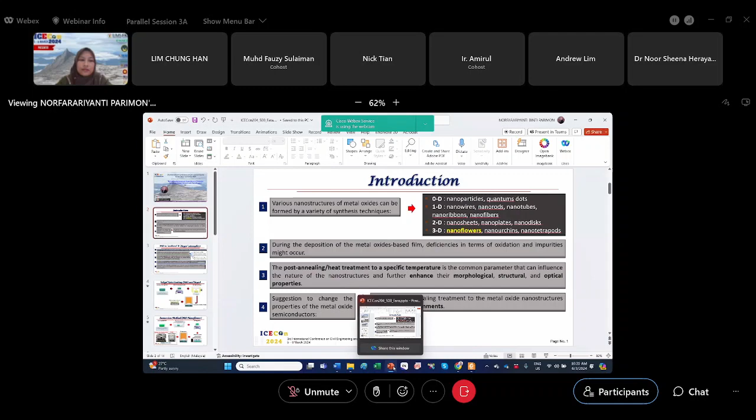Hello, Assalamualaikum, can you hear me? Yes, I can hear you. No problem, but my voice has echo, sorry, I just unmuted again. Okay, can you see my slide? Yes, I can, thank you. Thank you, Mr. Chairperson, IR Amirul.

Okay, my name is Norfarariyanti binti Parimon. I'm from the Center of Research in Energy and Advanced Material (CREAM), Faculty of Engineering, UMS. Today I would like to share my preliminary results of my research, entitled Annealing Environment Dependence of Solution Immersion Grown Nickel Oxide Nanoflowers.

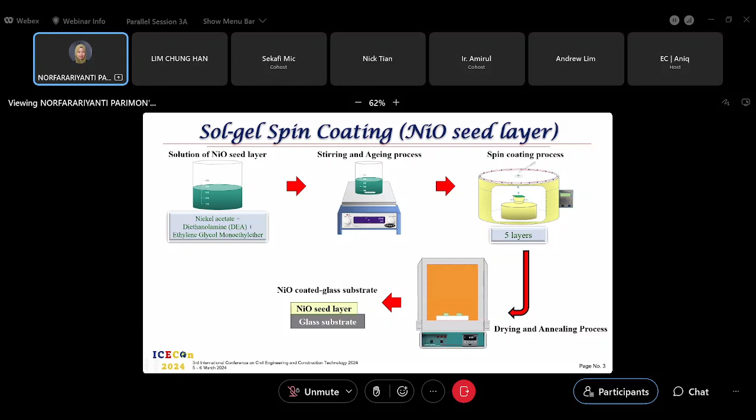Okay, previously we used ITO, which is indium tin oxide coated glass substrate, but this time we use the seed layer to improve the adhesion of nanoflowers.

Okay, and then the second step is using the immersion method. The solution preparation uses nickel nitrate, HMT, and deionized water, and we go through the sonication process, stirring, and the immersion process is at 95 degrees C for 2 hours in a water bath.

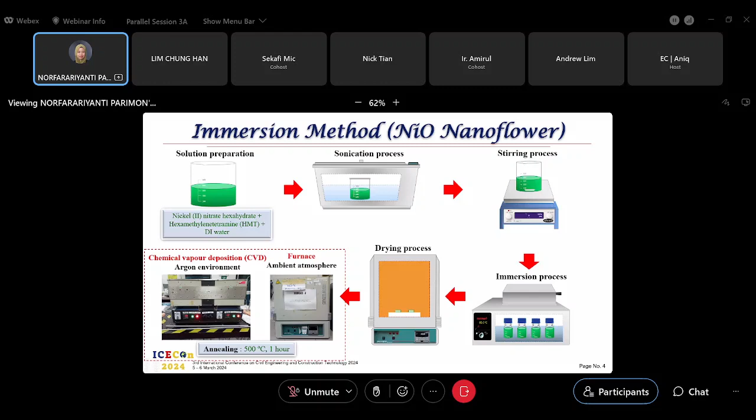And then a drying process at 150 degrees C, and the crucial part is the sample will anneal in the CVD, chemical vapor deposition, and the furnace. So in the argon environment, we anneal or calcine in the chemical vapor deposition, and with the ambient atmosphere, we anneal the sample in the common furnace. The annealing temperature is 500 degrees C for 1 hour.

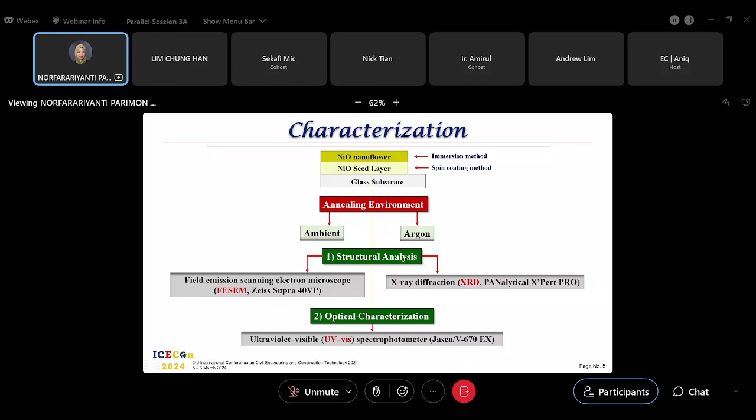Okay, for the characterization of the two samples, we just focus on the structural analysis and optical characterization. So maybe further improvement or characterization needs to be done other than the structural and optical. For the structural, we analyze using FESEM and XRD, and the optical characterization is using a UV-Vis spectrophotometer.

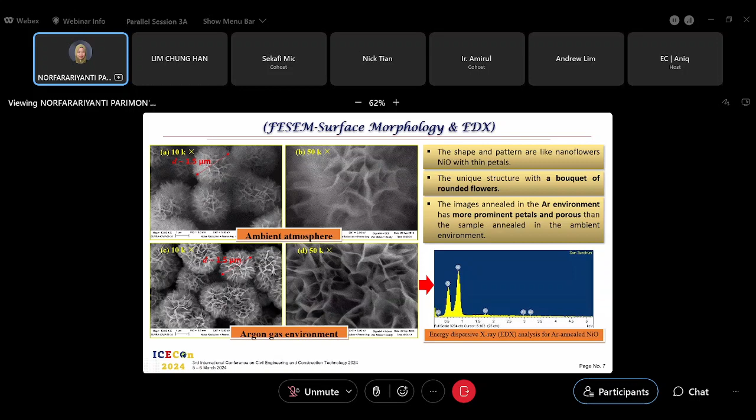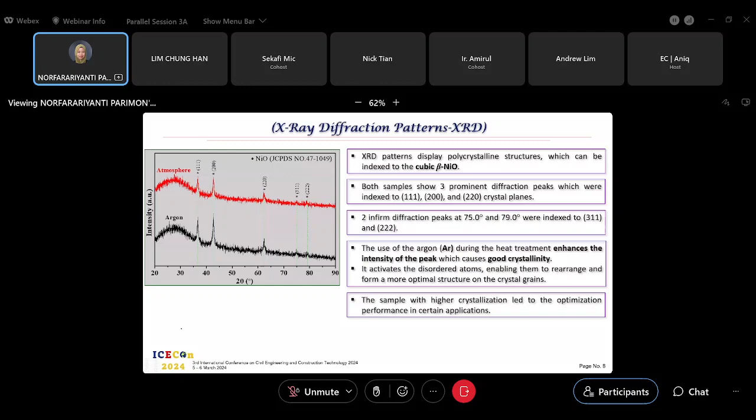And then we can observe from the diffraction peaks that with the use of argon, the intensity of the peaks could be higher, and it can enhance the crystallinity of the sample.

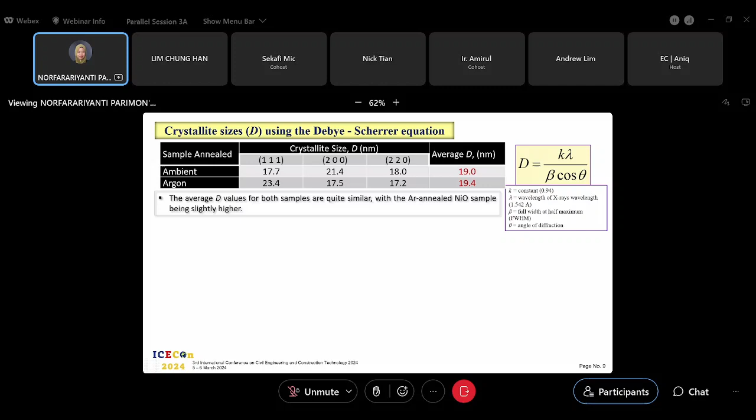Okay, and then we calculate the crystallite size of each sample and get the average crystallite size. We can see both samples are more or less the same size, with the argon-annealed nickel oxide sample being slightly higher, 19.4. We use the Debye-Scherrer equation to calculate the crystallite size.

Okay, as I said earlier, we have to improve the characterization with others, let's say electrical measurement, to know which is better from the result. Okay.

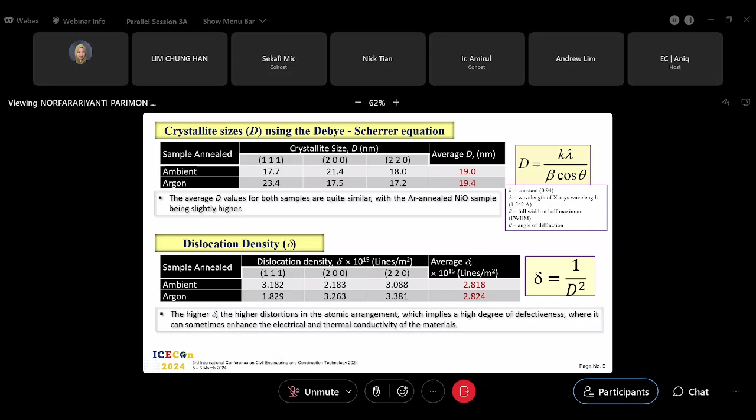Okay, for the optical properties, we measure the transmittance and absorbance of the samples. From the transmittance plotting, we can see the argon annealed sample has higher transmittance than the ambient atmosphere, which is 37% and 32%. Okay, the transparency is slightly higher in the argon atmosphere.

So maybe the variation of the thickness of the nanoflower causes the transmittance difference. But for both samples the transparency is lower than 50%. For the absorbance, we can see for argon the absorbance edge is below 410 nanometer, but for ambient atmosphere, it's lower than 360 nanometer.

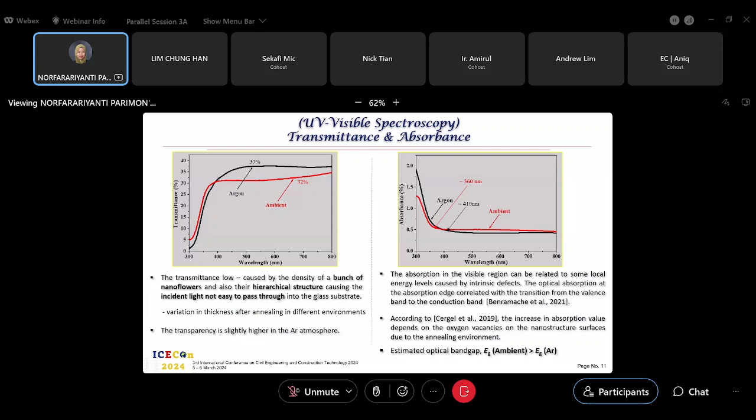And then we can estimate the optical band gap for the ambient annealed sample is larger than the band gap of the argon annealed sample. For the conclusion, we successfully deposited and grew the nickel oxide nanoflowers using the immersion method, and then we studied the annealing environment between ambient and argon.

Then we can see the surface morphology of both samples. For argon it is more prominent and porous than the ambient atmosphere. And from the XRD and optical properties, nickel oxide annealed in the argon environment exhibits improved crystallinity and higher transparency. And higher crystallite size was produced in the argon atmosphere, while generating a higher density of defects.

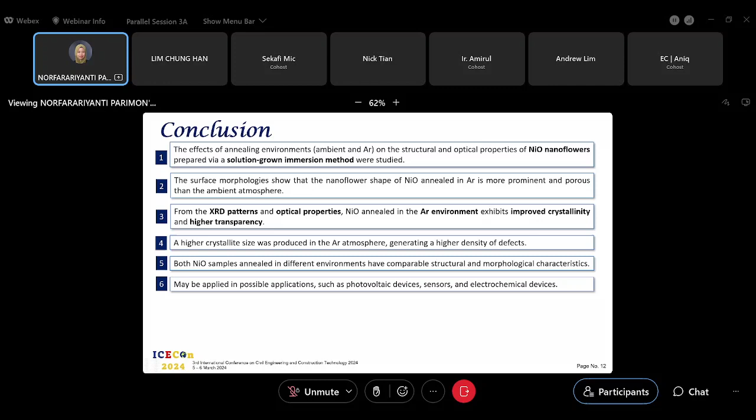So both samples annealed in different environments have comparable structural and morphological characteristics. We can maybe apply this sample for possible applications in photovoltaic devices, sensors, and electrochemical devices. Other than argon, we can suggest annealing the sample in nitrogen and oxygen atmospheres to see the difference in terms of their properties.

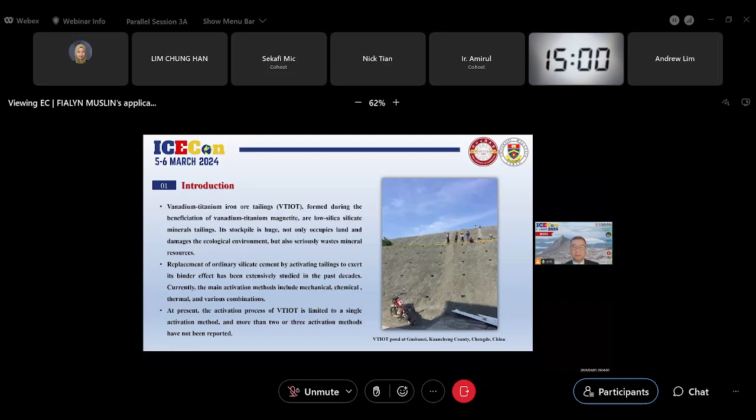In my study, on the basis of the best active tailings powder obtained from mechanical activation of VTIOT, with an activity index of 75%, we further adopt the hybrid activation technologies of thermal activation or chemical activation to study the effect of calcination temperature on the physical and chemical properties and activity index of VTIOT, and the effect of type and amount of activators on the activity and hydration mechanism of VTIOT, with the aim of enhancing the potential of the sustainable utilization of VTIOT as mineral admixture in replacement of cement and to support the research and application of green and low carbon building materials.

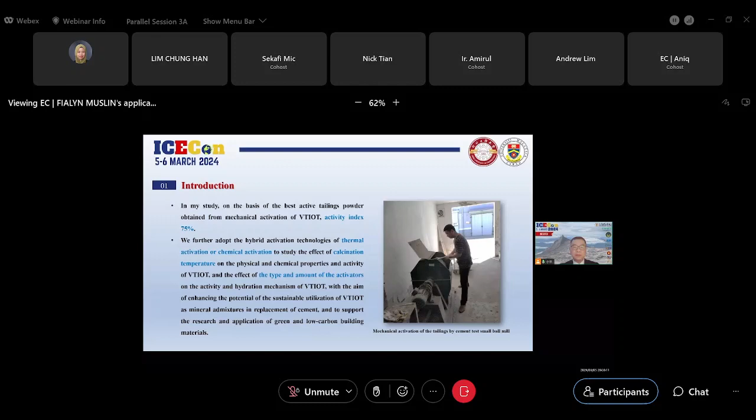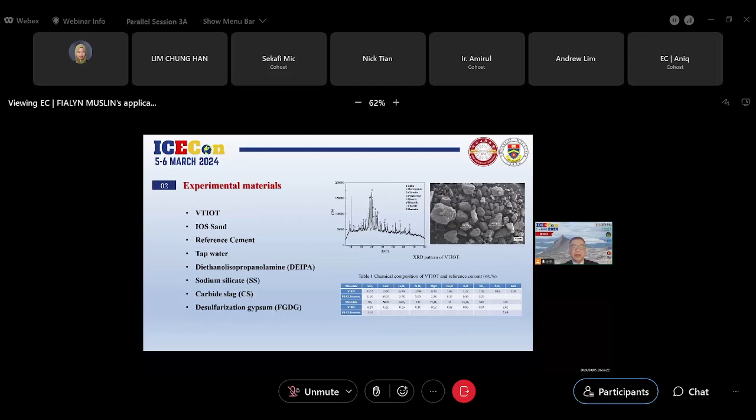Second, experimental materials: VTIOT, ISO sand, reference cement, tap water, DEIPA, SS, CS, FGDG. Third, experiment method: VTIOT powder was calcined in the muffle furnace. The temperature was set from 550 degrees to 950 degrees, holding 2 hours. The FGDG was calcined at 800 degrees, holding 2 hours. CS was calcined at 850 degrees, holding 2 hours. SS was diluted at 13.52%. DEIPA was diluted at 0.62%.

Mineral composition and morphology analysis of VTIOT used XRD and SEM, and to assess the active component within the VTIOT powder, the alkaline leaching method was employed. The activity index was determined by employing the following specific formula. The activator with the highest activity index in each group was selected for the paste experiment, and heat of hydration used TAM Air, and TG used a thermogravimetric analyzer.

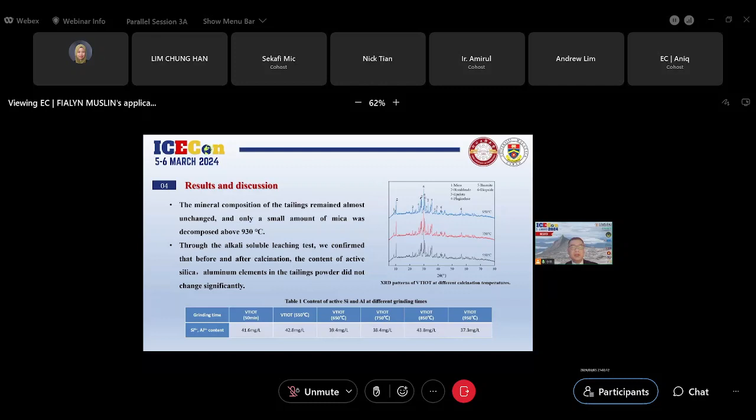The mortar test also shows that the 7-day and 28-day compressive strength of specimens after doping calcination and before doping calcination had no significant increase or decrease. This suggests that the use of thermal activation doesn't improve the activity index of VTIOT mortar in this temperature range.

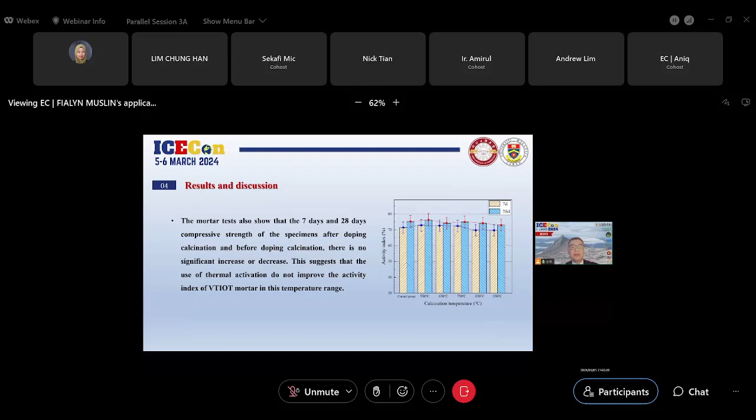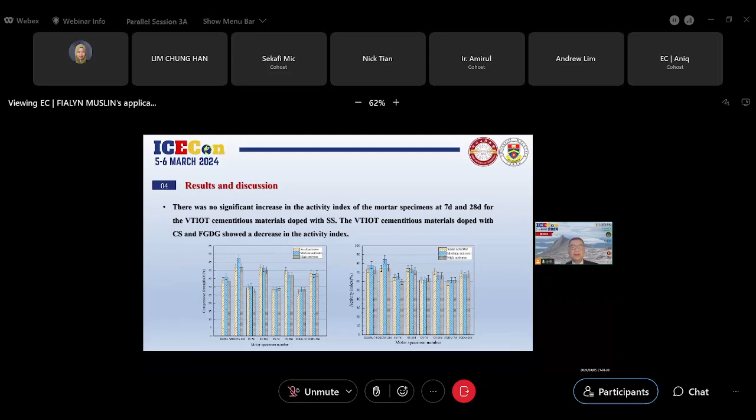2. Chemical activation. The mortar test shows that the 7-day and 28-day compressive strengths with 0.02% DEIPA are 36.1 MPa and 47.6 MPa respectively, promoting the hydration of VTIOT cementitious materials. Its 7-day and 28-day activity index reached 78.3% and 85% respectively. There is no significant increase in the activity index of specimens at 7-day and 28-day for VTIOT cementitious materials doped with SS, and those doped with CS and FGDG showed a decrease in the activity index.

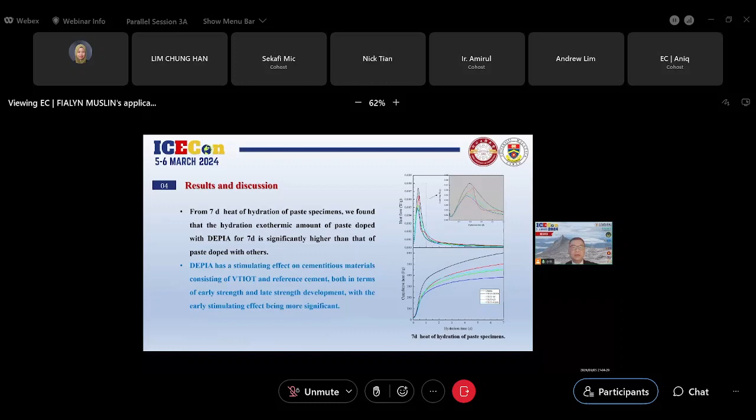From the heat of hydration of paste specimens, we found that the hydration amount of paste doped with DEPIA for 7 days is significantly higher than that of paste doped with others. DEPIA has a stimulating effect on the cementitious materials consisting of VTIOT and reference cement, both in terms of early strength and later strength development, with the early stimulating effect being more significant. From TGA, DTG, and SEM, we found that doping with different activators has some effect on hydration products formed by the cementitious material.

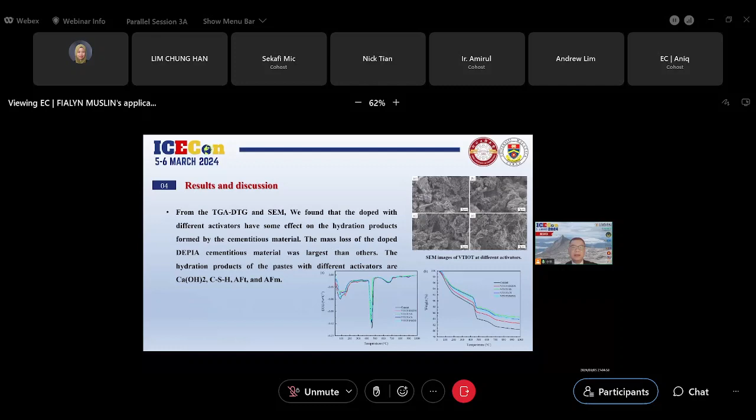The mass loss of the cementitious material doped with DEPIA was larger than others. The hydration products of paste with different activators are CSH, AFt, AFm, etc.

5. Conclusion. Calcined VTIOT at 550 to 950 degrees: the macromorphology, mineral phase, active silicate, and aluminum element of the tile didn't change significantly. Mechanical thermal activation failed to further improve the compressive strength and activity index of VTIOT mortar. The mechanical chemical activation type and amount of activator have a greater effect on the compressive strength and the activity

index of VTIOT mortar. The mortar doped with 0.02% DEPIA had a 28-day compressive strength of 47.6 MPa and an activity index of 85%. Compared with the non-added activator mortar, the activity index greatly improved.

Under the action of different activators, the hydration heat induction period of paste with VTIOT cementitious material is prolonged, and the hydration amount of paste doped with DEPIA for 7 days is significantly higher than others.

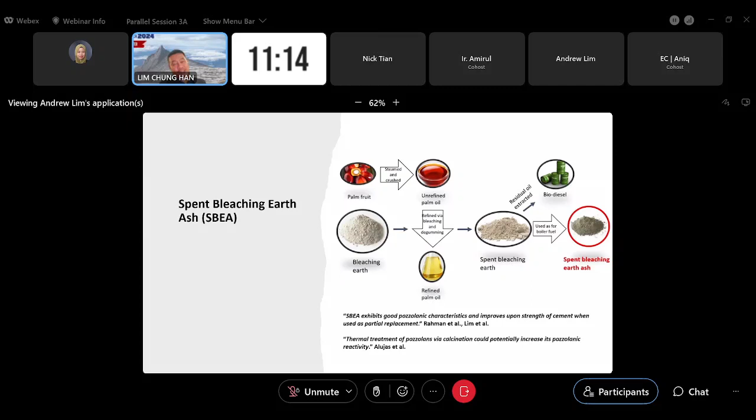Although in truth it's a bit more complicated than that. But in layman terms, a pozzolanic material is basically a material that you can use to partially replace cement. So you use waste material to replace cement, so you're saving cost, you're saving the environment, things like this. So that's the material.

Next, I need to briefly also talk about what a pozzolanic reaction is, because this will become relevant when I talk about the different methods which I'm going to use to assess the reaction. So basically, this is cement here. When you mix cement with water, you end up with what's known as calcium silicate hydrate, or in short, we just call it CSH in the industry.

CSH is what gives strength to your concrete. So when you mix cement with water, you end up with this, which gives strength to your concrete. But you also end up with a bit of calcium hydroxide within the mix, which doesn't do anything.

So what you can do then is introduce your pozzolanic material into the mix as well, and that will react with all this residual calcium hydroxide that is sitting there doing nothing to produce additional CSH. So basically, instead of just one portion of CSH, you now end up with two portions of CSH.

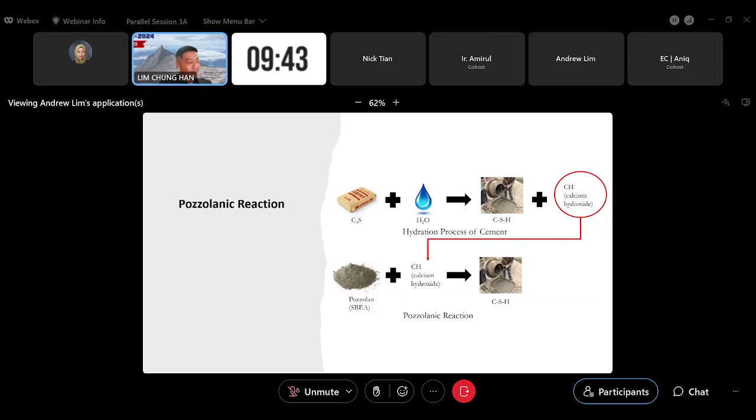So essentially, you should get more strength out of the whole mix. Okay, so that is the gist of what pozzolanic reaction is about. All right, okay, so for the test,

basically we are focusing on only 3 types of samples. So for the control sample, I'm using cement. Just your normal retail bag of cement. So I'm using that for control.

Test specimen 1 would be SBEA, the pozzolanic material itself. Test specimen 2 is SBEA but treated. So treated SBEA.

The way I'm treating it is very similar to what Nick did, through calcination. We expose it to high heat for 4 hours, 700 degrees Celsius, if not mistaken. As you can see, from black color, it turned into reddish orange color after being exposed to high heat for 4 hours. So those are the 3 different samples that I'm going to use to test out the 3 methods.

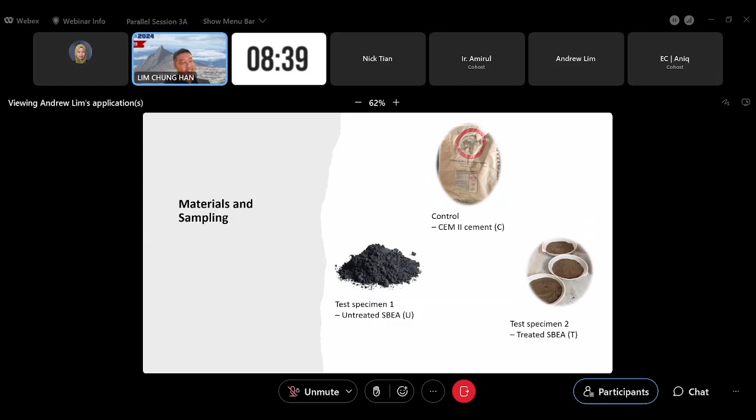The first method that I'm going to use is this: strength activity index method. This method is basically based on strength, assuming pozzolanic reactivity is related to mechanical strength. So we cast mortar cubes.

We cast a control set and a few sets containing the SBEA pozzolanic materials. The control sample would be set at 100% strength index, and then all the test materials, you would assess the strength in relation to the control sample strength, 100%. So if it's more than 100%, that means your specimen is stronger than the control sample. If it's less than 100%, that means it's not as strong as the control sample.

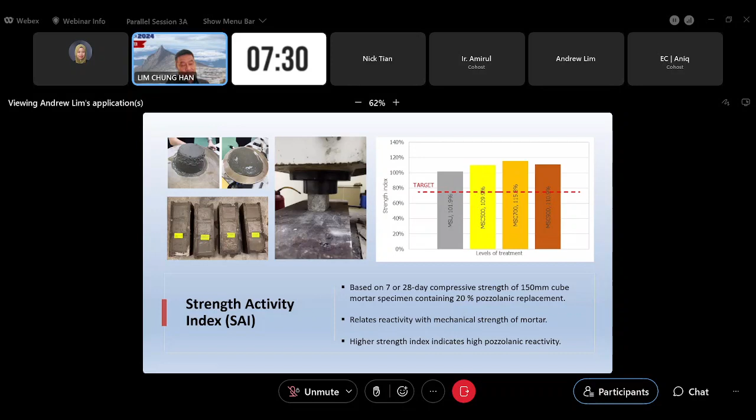So this is the first method I'm assessing the pozzolanic reactivity with, the strength activity index, so based on strength. The second method is very different compared to the first.

The second method is based on XRD, which is very similar to what Dr. Parimon did earlier. This method bases the pozzolanic reactivity on the morphology and, more importantly, the crystallinity

of the material. So basically what we do is we also cast, for this test, our mortar samples, and then we take a small chunk out of the mortar sample, crush it, and put it in this machine for it to generate the XRD diffractogram, which will tell us how crystalline the material is.

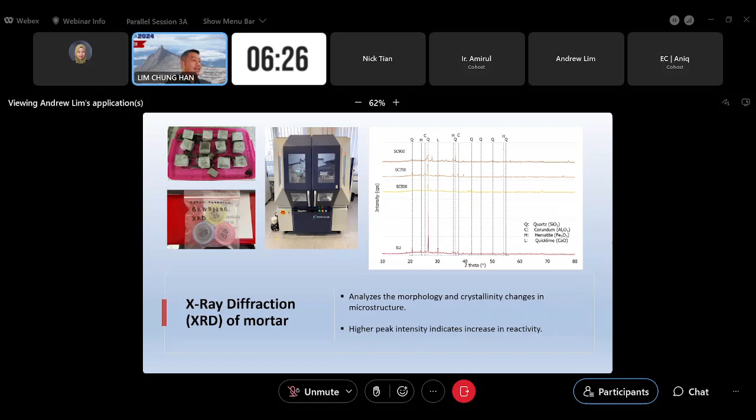And we will relate the crystallinity with the reactivity. So in essence, the higher the intensity, it should reflect higher reactivity as well, in essence. At least. So, finally, the third method.

This is the third and final method that I'm going to use, which I call the chemical method, the Frattini test. So what this does is, as you can remember, from when I was going through the pozzolanic reactivity slides just now, SBA or pozzolans require the presence of calcium hydroxide to react with, to produce this CSH paste.

So what this test does is we artificially introduce calcium hydroxide. We chemically produce some calcium hydroxide, and then we drop our pozzolanic material in there, mix it in to see whether this calcium hydroxide gets consumed or not. If it gets consumed, that means some pozzolanic reaction is happening.

So by the end of the experiment, if you end up with less calcium hydroxide, that means you end up with a lot of pozzolanic reactivity. So this is what I call the artificial method, using some chemical trickery. From this test, essentially what we're looking for is the lower the residual calcium hydroxide that remains, the higher reactivity you should get. So these are the 3 tests, in theory.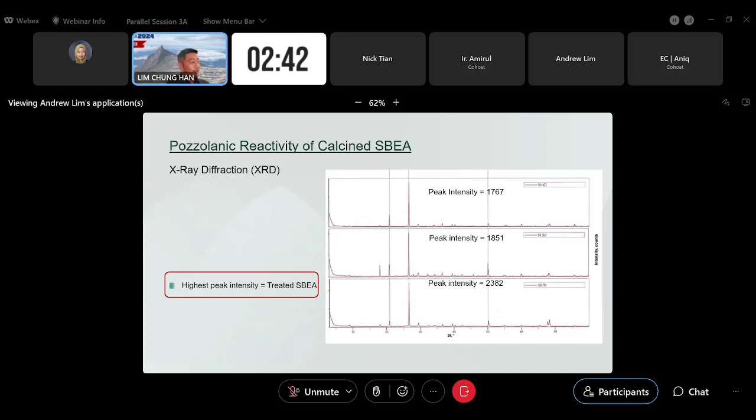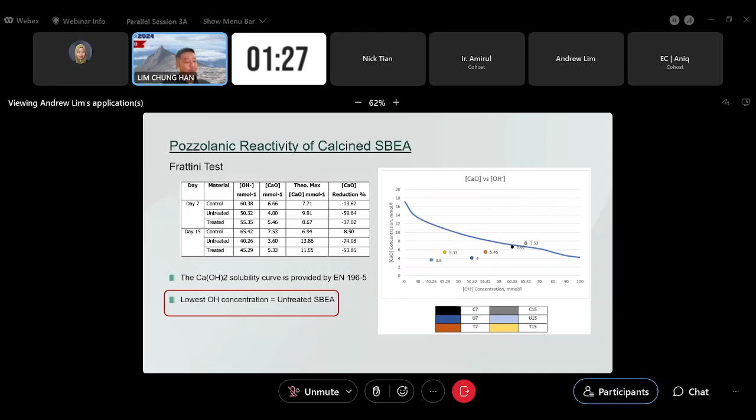So to conclude, what we're seeing here is the Frattini test and the SAI test - the first and the third test are giving us very similar results. In other words, it's telling us that the treatment of the pozzolanic material is not actually giving us any benefit. However, the XRD test is telling us a slightly different story - it's telling us that the treated one is the one giving us better performance. So as you can see, between the three methods, there are some differences between what results you can get. So yeah, that's basically it. I think that concludes my presentation for today.

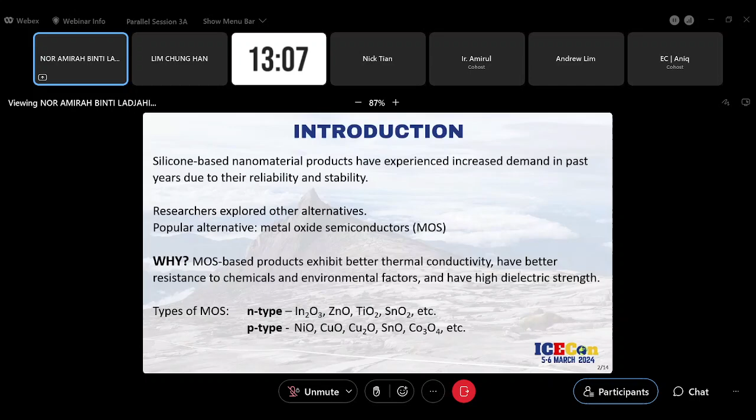So, starting with the introduction, in the past few years there has been a remarkable increase in the popularity of products made of silicon-based nanomaterial across various industries due to their reliability and stability. However, researchers have been actively exploring alternatives to replace silicon-based products that can perform as well or even better. Among those alternatives, they often use metal oxide semiconductors, which have demonstrated great thermal conductivity potential, chemical and environmental resistance, and dielectric strength, for example in electronic devices, sensors, capacitors, and semiconductor devices. Basically, there are two types of metal oxide semiconductor, N-type and P-type.

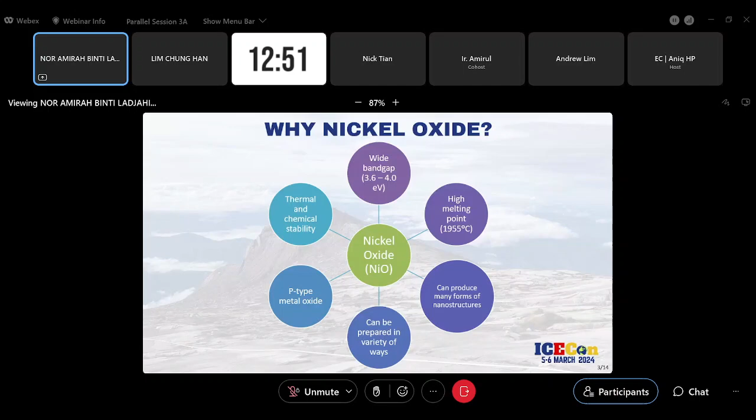So moving to the content of our work, we are choosing nickel oxide, a P-type metal oxide semiconductor, as a precursor due to its unique properties. As you can see here, there are 6 properties. For doping, we are using lithium. Why? Because previous research has proved that adding a dopant element into the precursor sample can modify the conductivity of the sample. Popular metals often used by researchers are zinc, manganese, chromium, lithium

and copper. We chose lithium because lithium has high mobility, which means it can easily move through the material, and has unique electrical properties, where it can donate electrons easily, allowing it to alter the conductivity and electronic structure of the semiconductor. So this work basically examines the lithium doped nickel oxide properties compared with pure nickel oxide.

To develop undoped nickel oxide and lithium doped nickel oxide samples, we started with glass cleaning, because we deposited the sample on a glass substrate. We deposited nickel oxide solution through a sol-gel spin coating method, producing a nickel oxide thin film. We continued the process through the immersion method, then continued with the characterization.

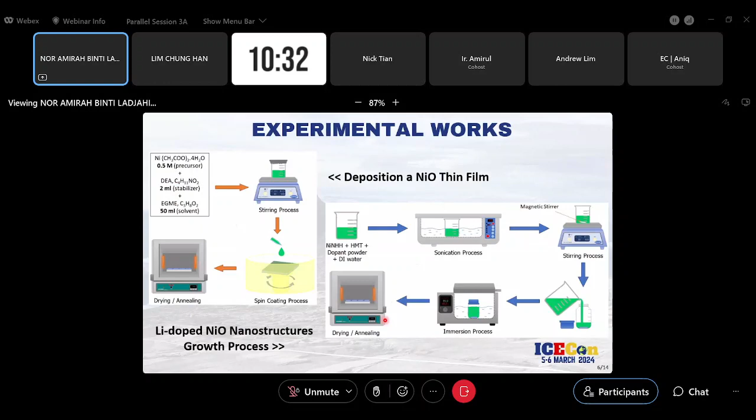In more detail, for the nickel oxide deposition process, we use a mixture of nickel acetate, diethanolamine, and 2-methoxyethanol. These act as precursor, stabilizer, and solvent, respectively, to form a thin film. So this is the process, while this picture represents the growth of the nanostructure of both undoped and lithium doped nickel oxide. And this is the parameter of the experiment.

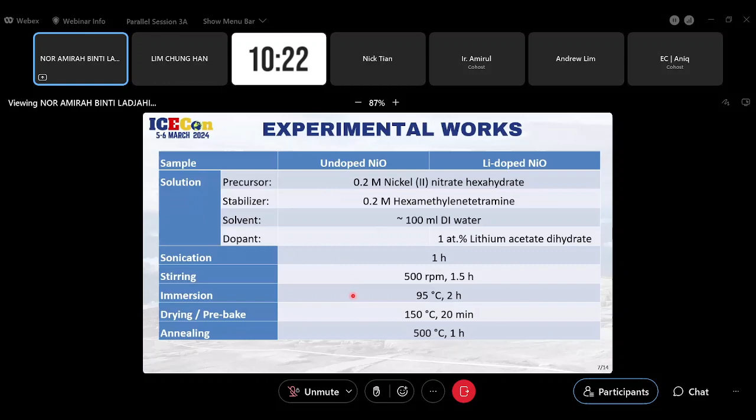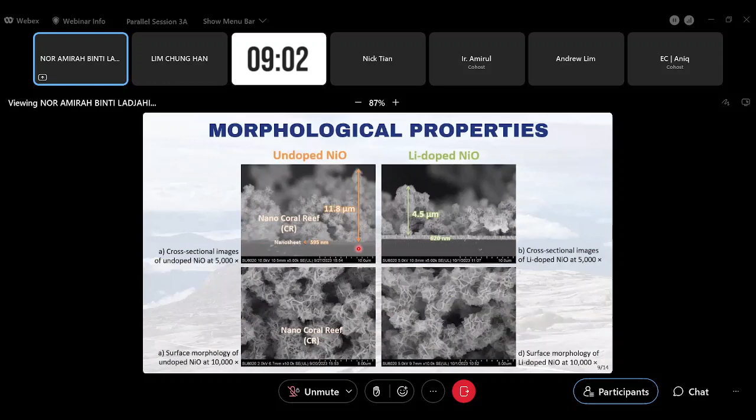For the other results, structural, optical, and electrical, I will conclude in the conclusion part. The undoped and lithium doped nickel oxide structures were successfully synthesized using a sol-gel immersion method. Significant differences exist between both samples regarding their properties. As I mentioned before, I use the thickness of the nanosheet to run the other properties.

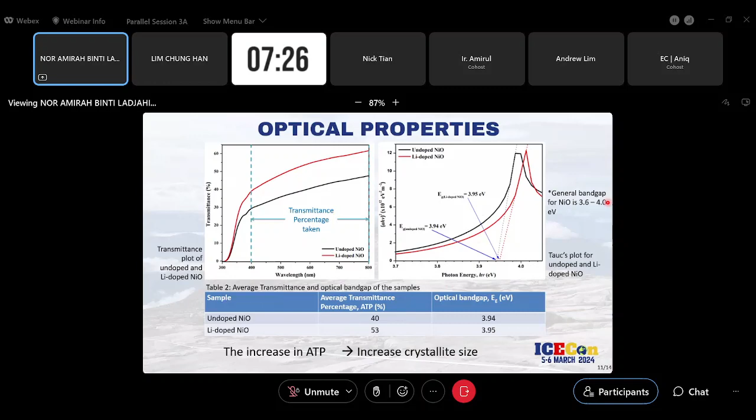Lastly, for electrical properties, the conductivity of lithium doped is higher than the undoped sample. From here we can conclude the properties of nickel oxide could be improved with the incorporation of lithium as the dopant element. Further information about the results you can ask during the Q&A session.

As we're running out of time.

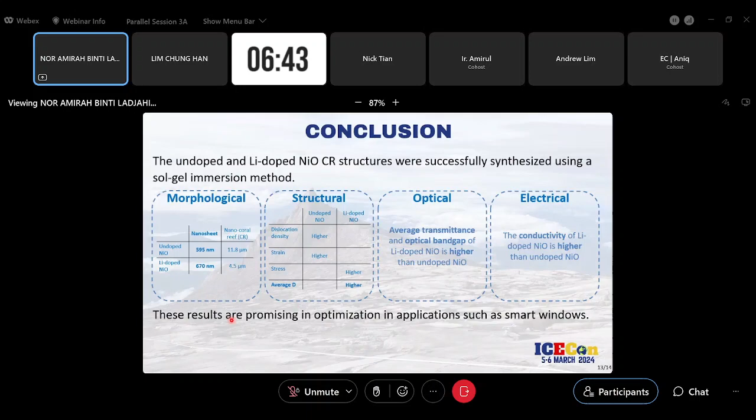Okay. So this result is promising for optimization in certain applications such as smart window material that can change color and transparency in response to the applied voltage.

A review of nanotechnology applications in sustainable cementitious materials. This paper is prepared by Prof. Farid Abed, and the secretariat will play the video for us to watch. And any questions, perhaps you can write them down and send them to the secretariat for them to convey to the author of the paper. Thank you.

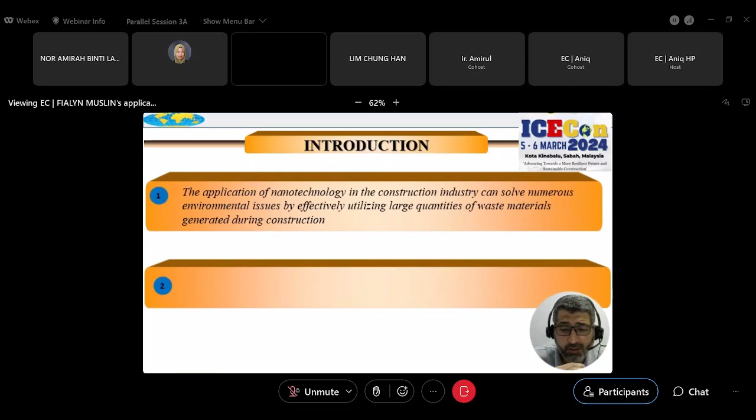First one is the application of nanotechnology in the construction industry can solve numerous environmental issues by effectively utilizing large quantities of waste materials generated during construction. And nanotechnology can improve the workability, compressive, flexure, and tensile properties, mechanical properties, as well as the durability properties, such as the water absorption, chloride ion permeability, and shrinkage.

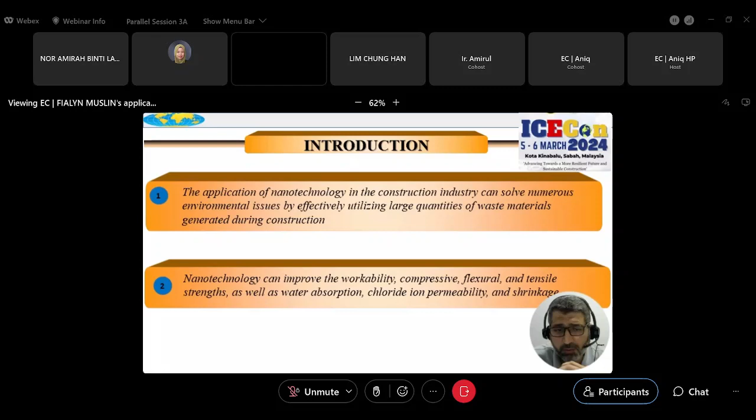The problem statement here that we're trying to state is that a substantial volume of waste materials remains unused, unutilized, and unrecycled, which in turn is contributing to the environmental challenges that we face in our life.

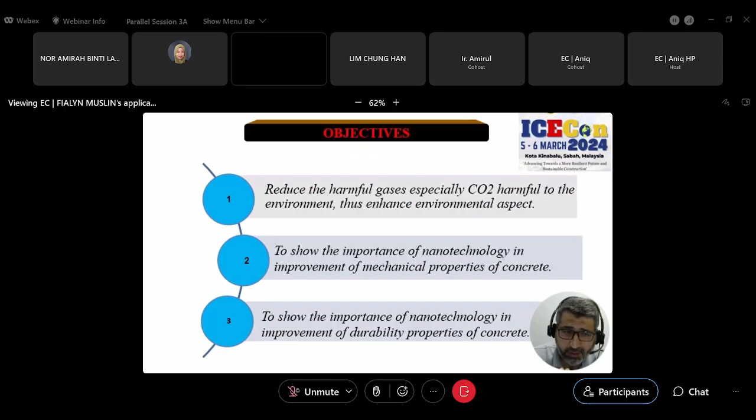So the main objectives of this review is to show the feasibility of the use of nanotechnology in reducing the harmful gases, especially CO2, or carbon dioxide, harmful to the environment, thus enhancing their environmental aspect. To show the importance of nanotechnology in improving both mechanical properties and durability properties of the concrete.

Before starting on the outcome of the literature review, let me just go over some statements from the literature that we know, but it's good to go over them again. As you know, the production of 1 ton of cement leads to release of almost 0.7 to 1 ton of emissions of carbon dioxide into the atmosphere, causing climate change and environmental pollution.

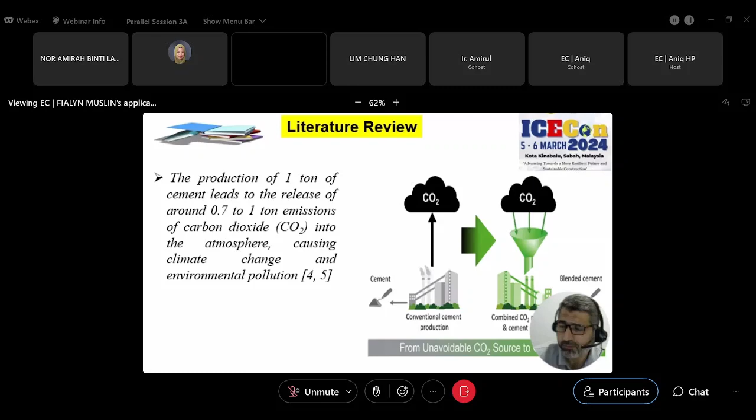So the main idea is actually to convert the conventional cement production from an unavoidable CO2 source to a sink of CO2 and reduce its negative effect on the environment.

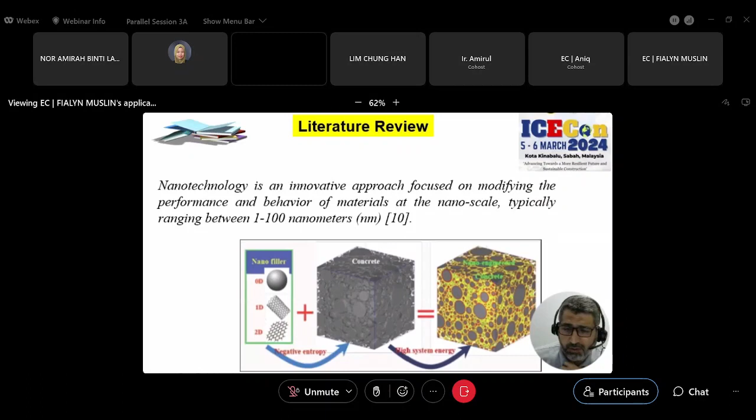One more statement here is that nanotechnology is known as an innovative approach focused on modifying the performance and behavior of materials at the nanoscale, usually between 1 to 100 nanometers. So changing the negative entropy, the use of nanofillers in the concrete will produce high system energy and nano-engineered concrete. So this process can also achieve significant environmental and sustainability benefit within the construction industry.

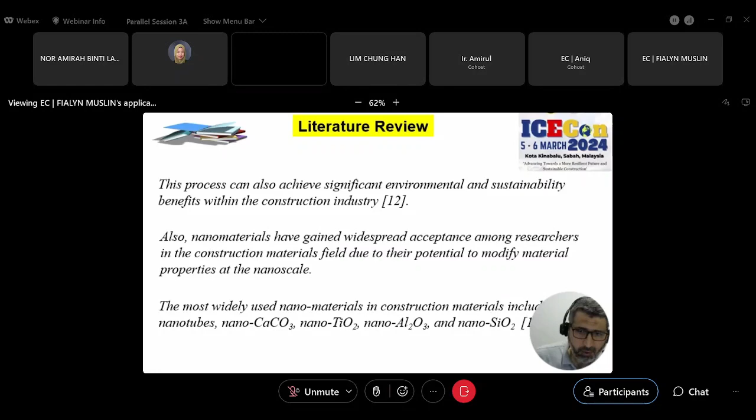The most widely used nanomaterials in construction include carbon nanotubes, nano CaCO3, nano titanium oxide, nano alumina oxide, and nano silica oxide. So I'm going to show you some outcomes of this literature review. The first is the effect of using nanoclay on the properties of cement, mortar, and concrete.

Their outcome and its effect on the concrete properties: they observed that the high pozzolanic activity and large surface area of nanoclay contribute to enhanced performance when added to concrete samples, in turn resulting in increased compressive, flexure and tensile properties.

Another study by Mihrabi also showed that with the use of up to 9% of nanoclay in almost 350 kilograms per cubic meter cement content, owing to their microfilling ability and pozzolanic reactivity, the use of nanoclay leads to an increase in the density of concrete. In addition, the high pozzolanic reactivity and specific surface area of nanoclay can minimize the porosity and increase the density of the cement mortar.

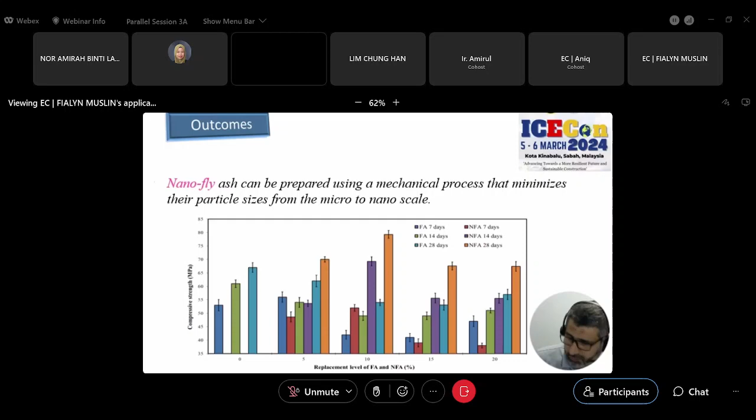And you can see from here that the use of 10% was the most optimum percentage in improving the compressive strength of concrete, from I would say 60 to 85 megapascal, which is huge. But then they noticed that it can start decreasing. So the results showed that 10% of nano fly ash or fly ash is more optimum to improve the compressive strength.

Another outcome here is to show the effect of nano palm oil fuel ash, or POFA, on the cement, mortar, and concrete properties. Hamada et al., which is our postdoc here, used up to 150 kilogram per cubic meter nano POFA content with cement content of up to 500 kilogram per cubic meter. They showed that the use of 30% nano POFA as a cement replacement has significant impact in improving the workability of concrete mixtures. Nano POFA led to increasing the compressive strength up to 58 megapascal,

as well as improving the durability of concrete. In another study by Wee et al., who used up to 400 kilogram per cubic meter nano POFA with cement content of 450 kilogram per cubic meter, they observed that the compressive strength increased with time due to creating further CSH gels. Consequently, the optimum proportion of nano POFA is 30%, which should be used to get the best performance of concrete.

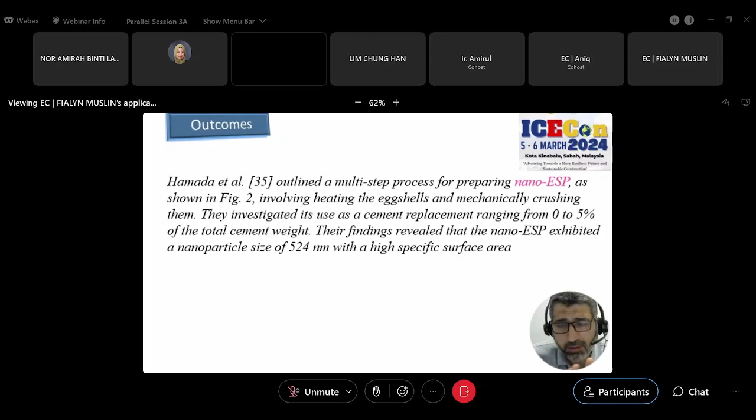So Hamada et al. outlined a multi-step process for preparing nano eggshell powder, as shown in figure 2 here. They outlined a multi-step process for preparing nano ESP, eggshell powder, involving heating the eggshells and mechanically crushing it. So as you can see here, heating in an oven up to 110, then mechanically crushing it. Then they investigated its use as a cement replacement, ranging from 0 to 5% of the total cement weight. Their findings revealed that the nano ESP exhibited a nanoparticle size of up to 524 nanometers with a high specific surface area.

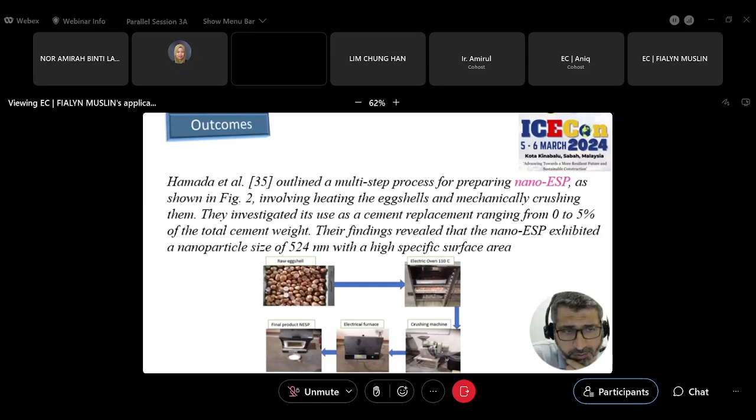Another table showing the outcomes here is the effect of nanoslag on the properties of cement, mortar, and concrete. Sahu and Bera used quantities up to 40% of nanoslag content, with cement content up to 537 kilogram per cubic meter. They showed that the addition of 20% nanoslag as a cement replacement resulted in higher compressive strength compared to other concrete mixtures, with an increase of up to 17% compared to the control specimen without nanoslag. However, the compressive strength reduced gradually as a result of adding more than 20%. So 20% was their optimum percentage.

Sadawy et al. also showed that the addition of nanoslag can increase the formation of CSH products, thus resulting in an increase in the early age compressive strength of concrete. Ab Atiyah et al. also used 22 kilogram per cubic meter nanoslag content with 450 kilogram per cubic meter cement content. The addition of nanoslag results in an increase in the density as well, up to 1.43%, and reduction in the porosity and water absorption.

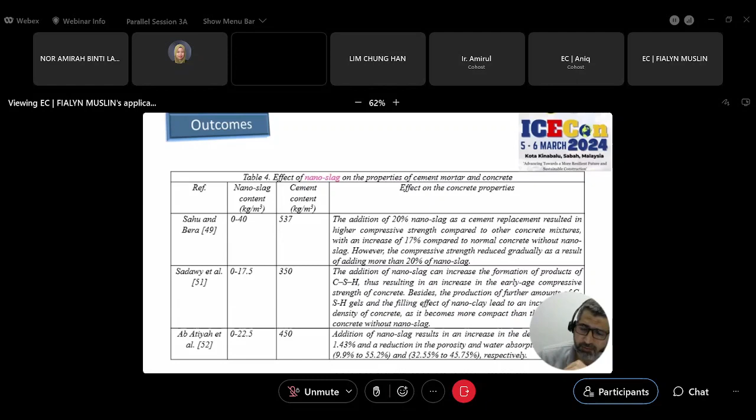This table also shows the effect of using nanoglass waste on the properties of cement mortar. As you can see here, most of the paper is about using the waste, and that is the target of the actual review paper, at the nanoscale. So you can bring glass and then crush it until you reach a certain size at the nano level, and use it in the concrete mixes.

So Onaizi et al. used up to 46 kilogram per cubic meter nanoglass content with cement content of 460 kilogram per cubic meter. They observed that the addition of nanoglass resulted in reducing the slump value by about 12% compared to the reference sample because of the shape and high specific surface area of nanoglass powder. Whereas the addition of 5% nanoglass powder led to an increase in the compressive strength of concrete from 12 megapascal to 21, almost 80%.

Amran also used the same percentage, but he observed that the addition of nanoglass led to a reduction in the workability of concrete, with increasing the nanoglass powder from 0 to 6% enhancing the compressive, flexural and tensile strength of the concrete mix.

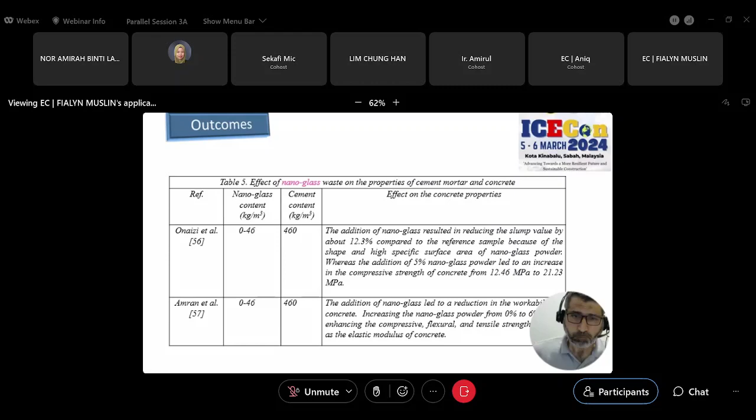So as a general conclusion of these, I don't need to increase the time, so there are many other results to share, but I believe here I will just go over the main point of the conclusion of these studies.

So one of them is the addition of nanoclay and calcined nanoclay can improve the performance of cement concrete and prove to be optimal materials due to their availability, pozzolanic properties, high specific surface area, and cost effectiveness when compared to other materials. Both nano fly ash and nano POFA exhibit a high pozzolanic activity and possess a high specific surface area. Thus, utilizing them as partial cement replacement can lead to increased compressive strength and reduced water absorption.

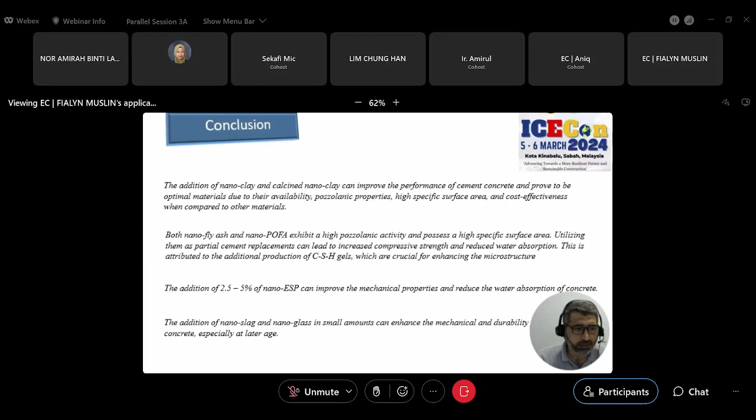This is attributed to the additional production of CSH gels, which are crucial for enhancing the microstructure. Also, the addition of 2.5 to 5% of nano ESP eggshell powder can improve the mechanical properties and reduce the water absorption of concrete. And finally, the addition of nanoslag and nanoglass in a small amount can enhance the mechanical and durability properties of concrete, especially at later stages. So these are the main conclusions.

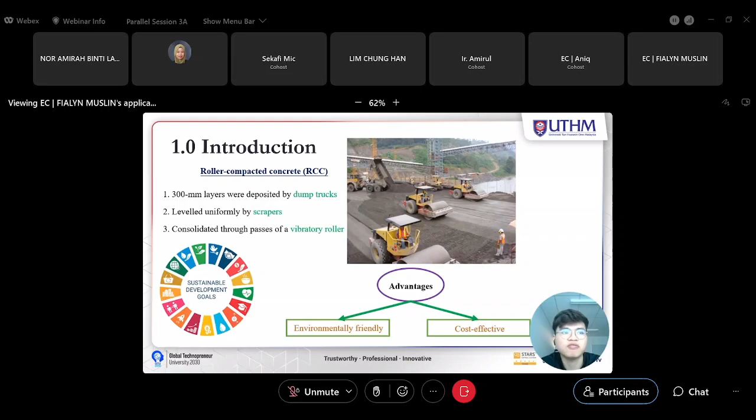So why do we choose RCC? Because of its advantages, which can be environmentally friendly and also cost effective. This is because less cement is utilized for making the mix design for the construction of RCC. That's why it could be effective for achieving the SDG, which is the hot topic now all around the world.

RCC should be designed based on the feasibility study, which has been made for the Nenggiri hydroelectric main dam based on the situation, which is the site, whether it is applicable or not for construction of RCC based on the economics and also other factors.

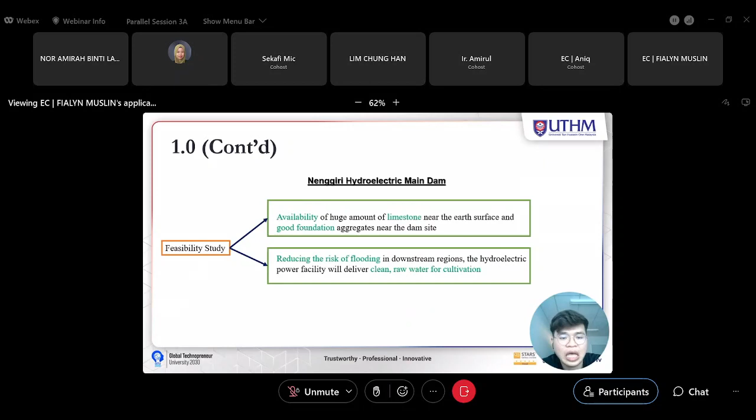Now I would like to present the two factors which are mostly of concern. The first one is the availability of a large amount of limestone near the earth surface and also a good foundation aggregate near the dam site. That's why it is applicable to use these natural resources for RCC construction, using this aggregate which is available on or near the site. Also this can benefit the people, as it can reduce the risk of flooding and also produce clean and raw water for cultivation.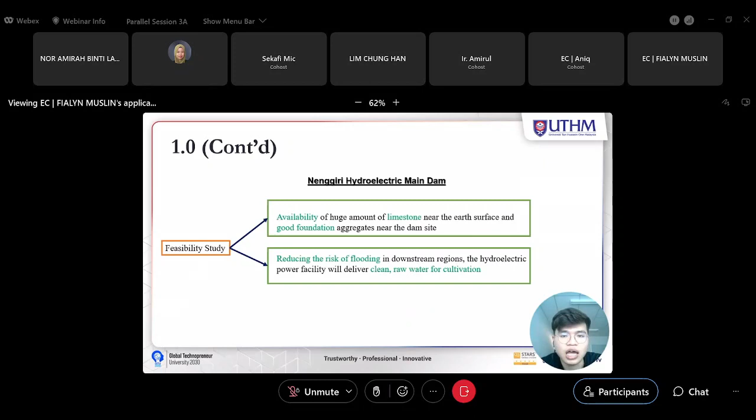The purpose for doing this research is because of a few challenges. First, the mix production plays an important role in RCC dam construction, determining all properties of RCC, which start from the mix design. That's why the mix design should be made properly based on the requirement. That's why various mix designs will be developed and all the properties identified based on the spec, and also the prospect of obtaining suitable material could be challenging based on the site.

That's why all the materials should be evaluated and tested, and then based on the properties of these natural resources, we can do some exercise of adjusting the mix proportion to achieve a desirable final product. And also, last but not least, the trial placement should be considered after all the mix designs have been developed to ensure the suitability and efficacy of the design mix prior to proper placement.

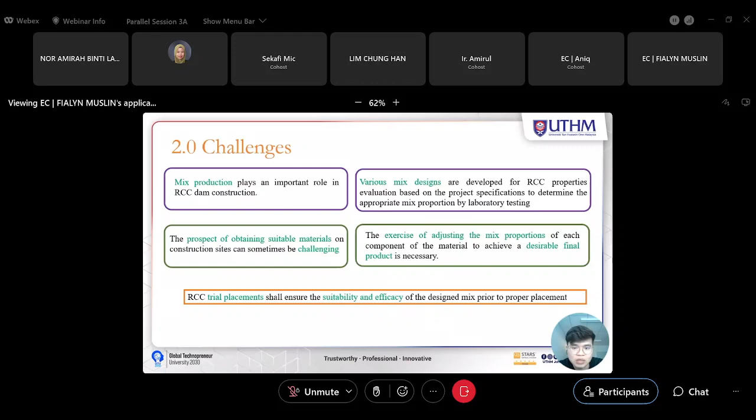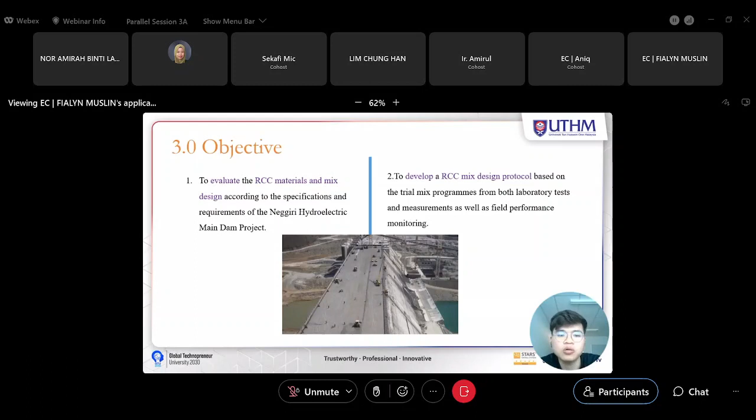The objective of this research is to evaluate the RCC material mix design and also to develop an RCC mix design protocol. Now we are moving to the methodology. So first of all, we have to start from sampling of RCC material to evaluate the RCC materials, which are the aggregate, cement, fly ash, and water based on the spec.

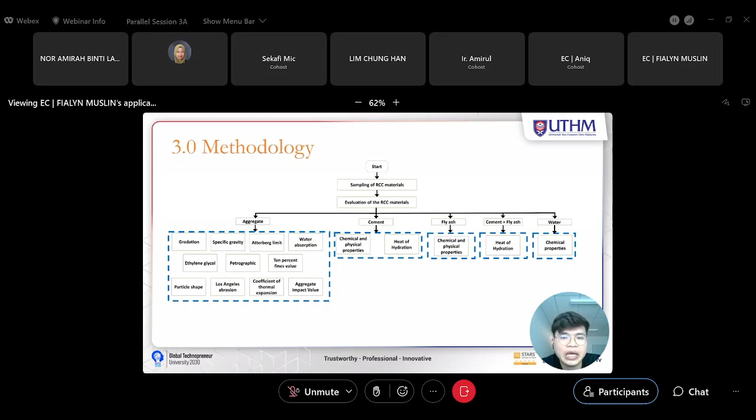Firstly, for the first stage of RCC mix design, we should evaluate the suitability of using the mix design, like molding the RCC cylinder for testing direct tensile strength and compressive strength. Because RCC is a zero slump concrete, we should use the technology for measuring slump for zero slump concrete, like Vebe time, to determine the consistency.

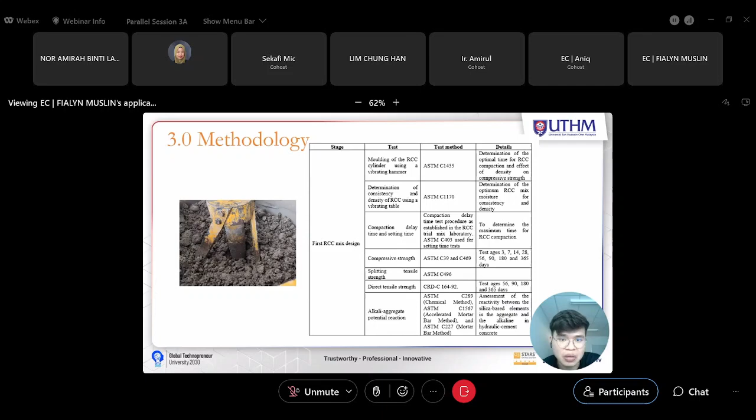We can also determine density based on the test method. Setting time is also a major concern because this RCC is compacted layer by layer, so the setting time should be identified for site construction. The alkali aggregate potential reaction is also something we should consider to determine the durability of the concrete.

After we have finished the first stage of RCC mix design, we will select one or more mix designs for further study. In the second stage, we will do a more detailed study on thermal properties, strength properties, and lift joint properties determination.

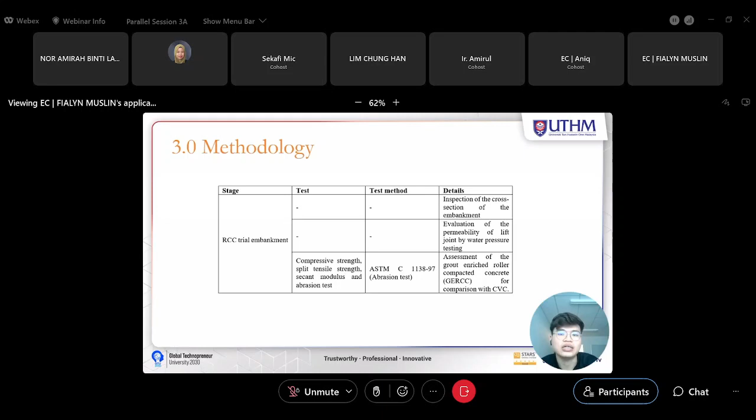Lastly, the selected mix design should also undergo trial placement before the proper placement, which can be inspected and evaluated based on site production for the trial embankment, to evaluate the permeability and also the in situ strength based on site production.

This is the continuation of the G2 result for particle shape.

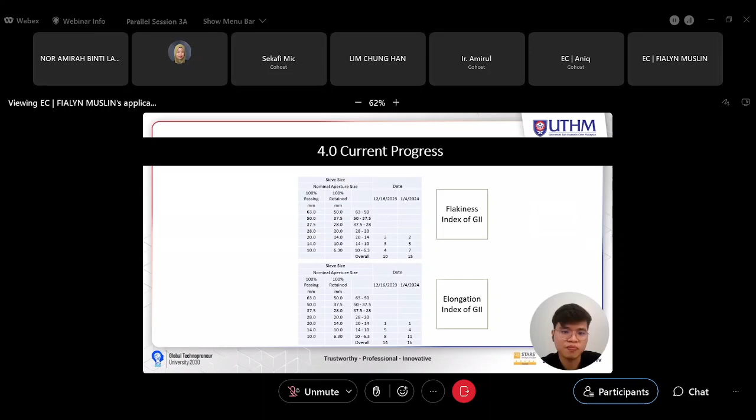After we have evaluated the material, we are going to do a preliminary dry mix based on the aggregate, which is the combined aggregate that can be utilized for making the dry mix, which is the graded one.

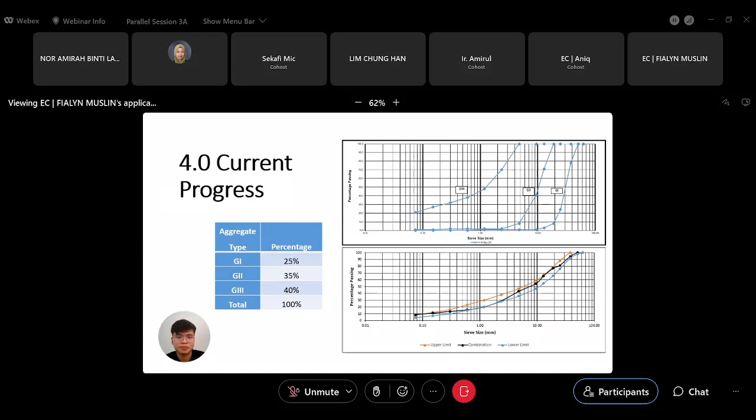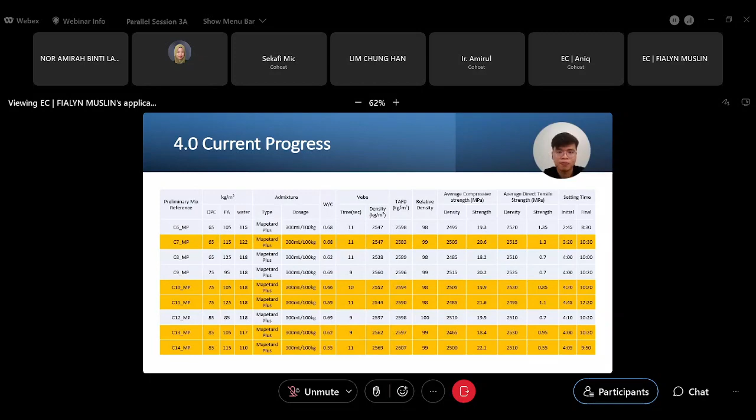That's all for me. Thank you.